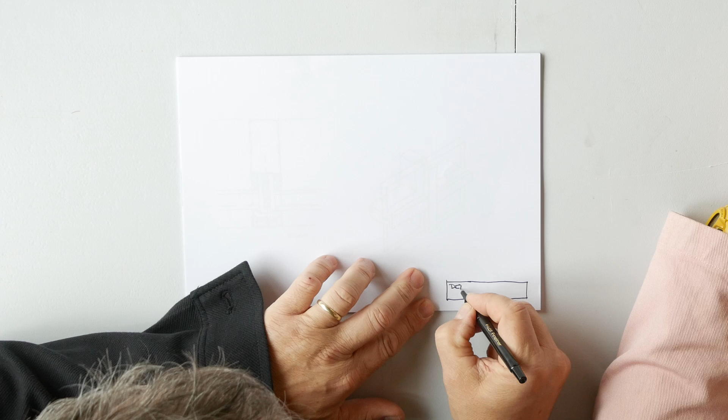So detail number one: horizontal section, standard facade system, 1 to 2, and this is detail 1. And yeah, we wanted this as a system, so going to do it in half scale. So I need to make sure I have it the right size. I have to draw the detail as a system.

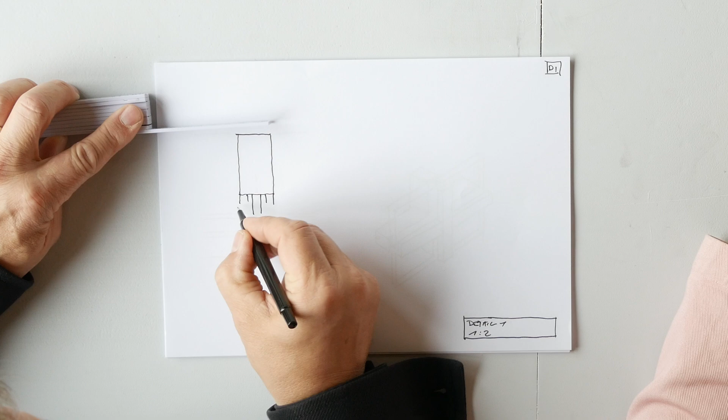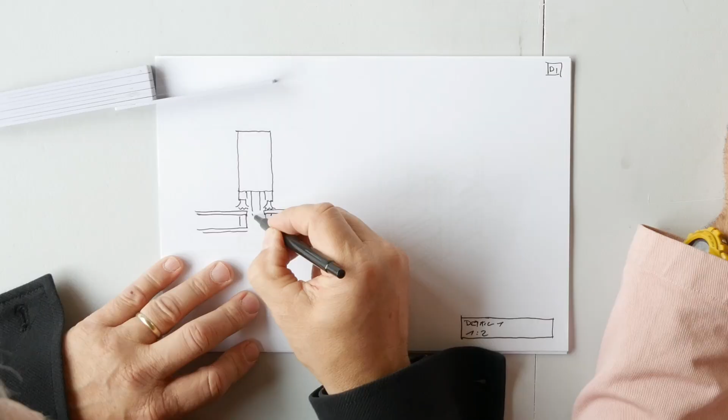1 to 2 is actually kind of like a nice scale of it. You can see almost the thickness of the various layers. It saves a little bit of paper, and you can create quite a nice overview on an A4 paper. And for a sketch design, I don't need to be super precise on everything. Later also it will be transferred into a CAD detail.

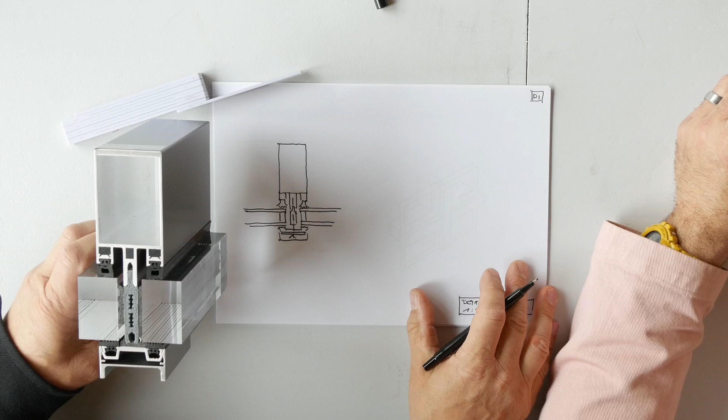Let's take this here, let's do the cover cap here. But we almost always start with hand sketches, so it's so much easier to develop these details by hand on sketches. So this is the detail, but we also need the connection lines. Usually the horizontal beams are a little bit shorter. It's a better detail.

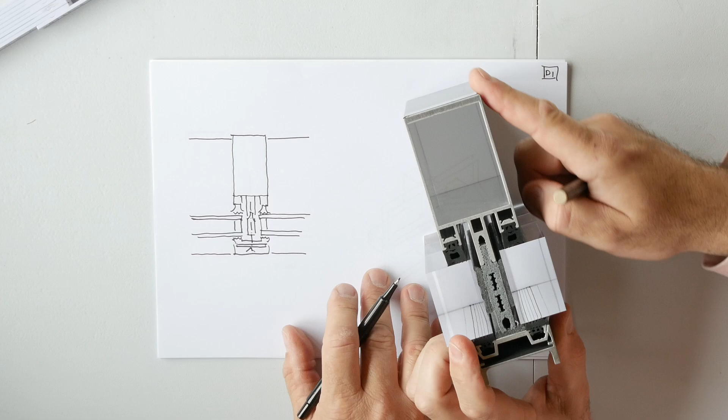Why is this? For instance, on the facade edge, something horizontal, they have a round over, so in order to have a nice detail here with no sharp edges of the cutting edge of the profile, they are a little bit offset, and therefore you don't have to deal with the cut aluminium being visible, the round over edges. This is, say, the facade system suppliers talking.

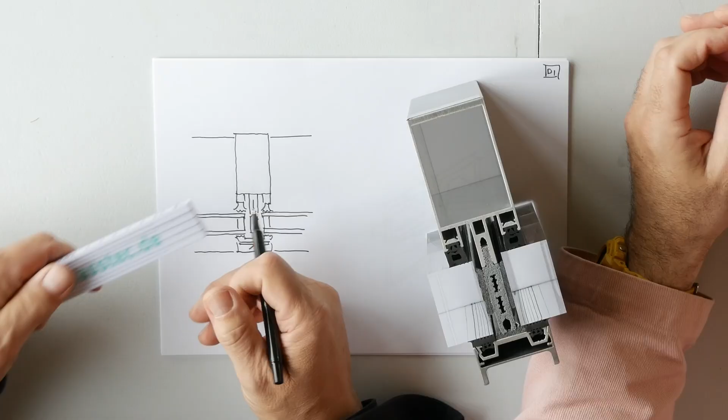When I'm now an architect and I want to have this flush? Yeah. There's also tolerances within the system. You want to make sure that it never protrudes out, for instance. But it's an aluminium system. This is super precise. Yeah, but so yes, you can get it, but you raise the risk of having tolerances. So yes, you can get it if you really want. We would see it when we visit the company.

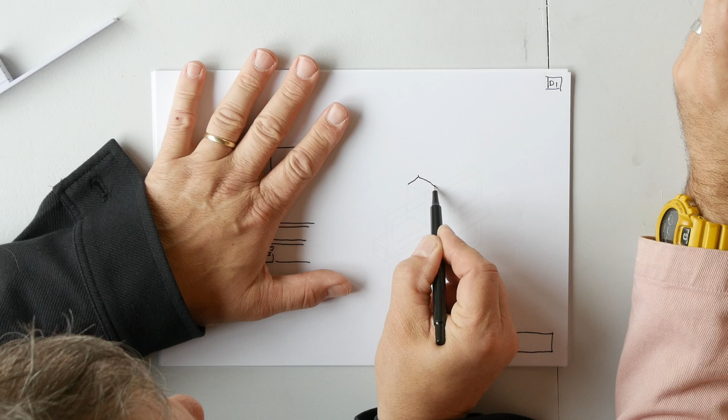Right. Now, I'd like to do this as a three-dimensional sketch. So I start with, let's say, the aluminium system, and that's a sketch without perfect measurement. This is just a three-dimensional sketch, an isometric view, and I have the insulated glass in here. I just draw it this way, then this.

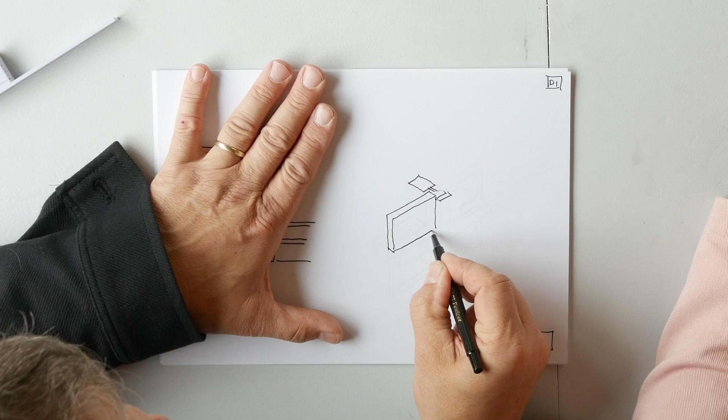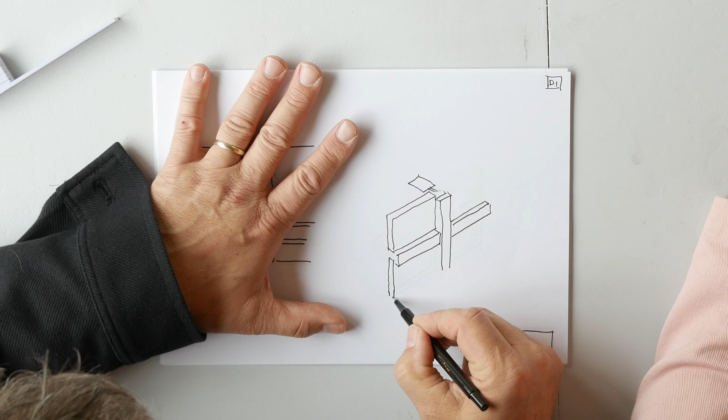Do you always do that in general? I like to do that because it helps me to understand the system and where we are. It really helps you to understand, okay, this is the stick system, and I see a standard corner of a stick system. This is the outer view. Then there comes insulated glass at the bottom part. Then it continues like this. We see the inner line.

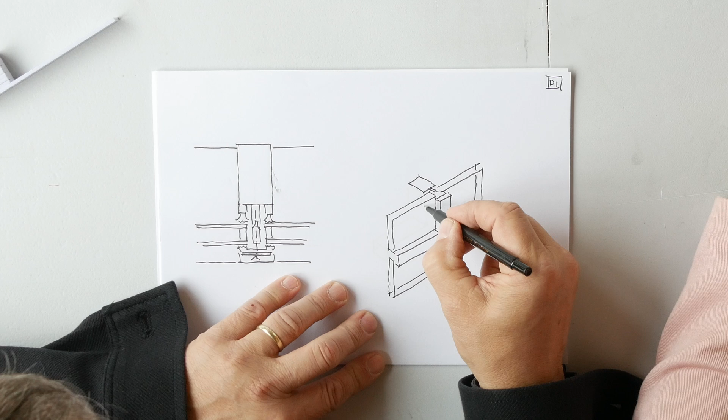And what you see is it really develops the full geometry of the object. This detail is the main information which we need, but it helps you to identify, and for the orientation it's way easier. Also, if you want to communicate on a set of drawings, it's always easiest to jump into an isometric view, because then you can really see what is behind, which layer comes first.

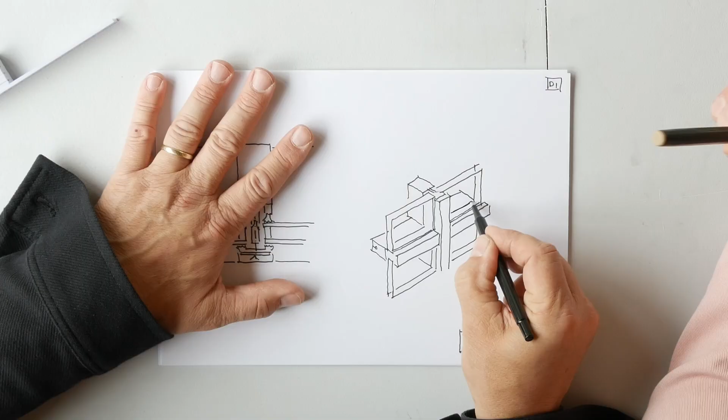And especially, this is a standard cross joint, but later on, when we come to the various layers of vapor barriers, insulation, whatsoever, it becomes quite tricky, and then you want to make sure you have an overview. So this is detail number one, the main section. This is the simple one. I would always add a double line here, even in 1 to 2 scale, because then you can see the aluminium extrusion profile.